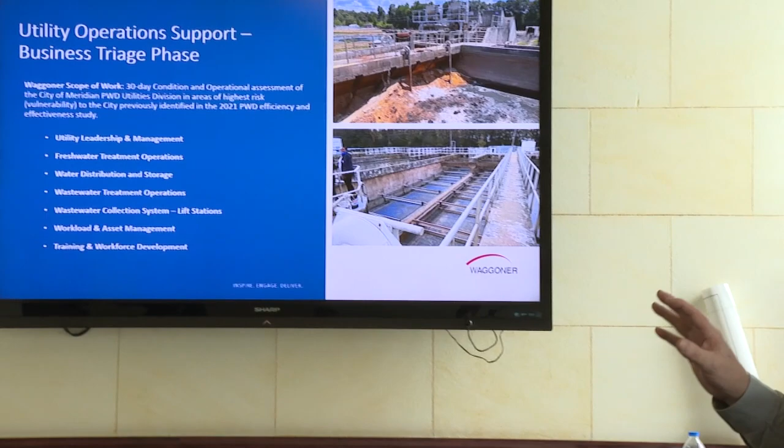So we were asked to do a 30-day business triage. It was to go through and look at the utility division, which is made up of water and wastewater. Specifically, we were looking at the areas of utility leadership and management, freshwater treatment operations, wastewater treatment operations, the distribution system and storage in the system for water, looking at the collection system for wastewater, workload and asset management for the staff that you had, and then training and workforce development. Those were the areas we specifically wanted to look at during this 30-day period.

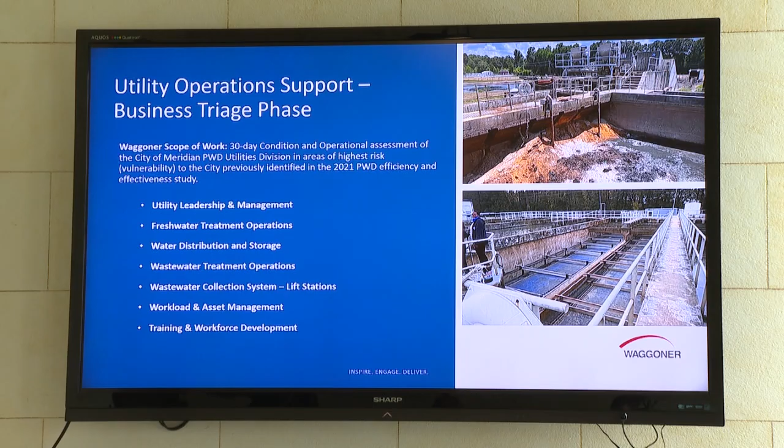Now, you can imagine 30 days is pretty quick, and that's a lot to cover in a short amount of time. Go to the next one.

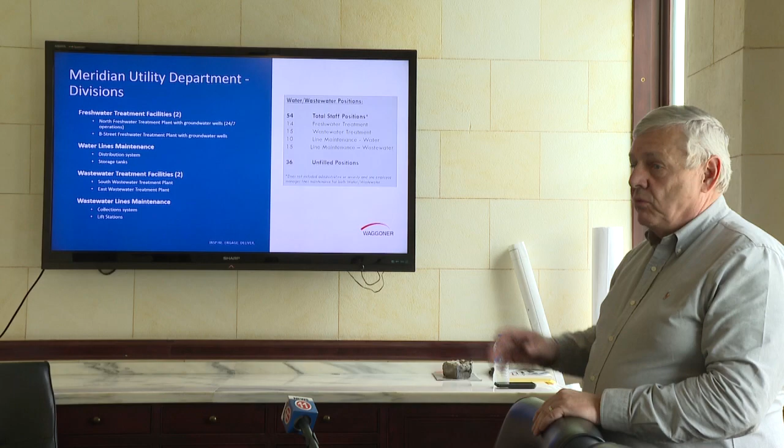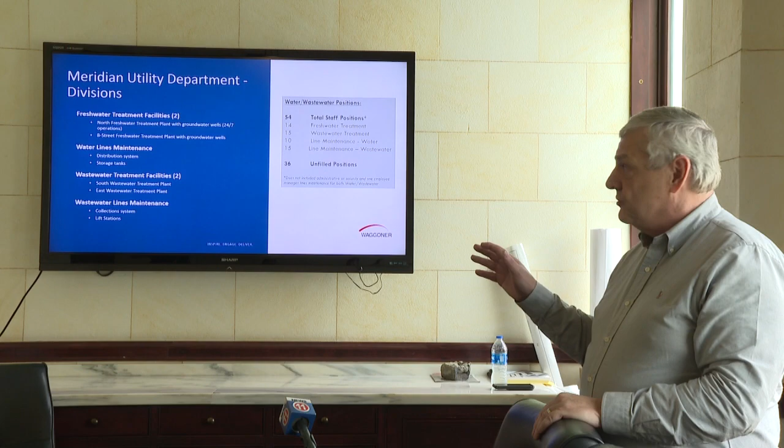And we had to do it in all these areas. In freshwater treatment, we have the North Water Treatment Plant and the B Street Water Treatment Plant. In water lines maintenance, we have about 470 miles of water distribution piping. Then you have 5 storage tanks that make up about 12 million gallons of storage in the system. And then you have 2 wastewater treatment plants: the South Wastewater Treatment Plant down by the airport, and the East Wastewater Treatment Plant on the east side of town. And then the collection system, which is roughly 450 miles, takes wastewater to those 2 wastewater treatment plants.

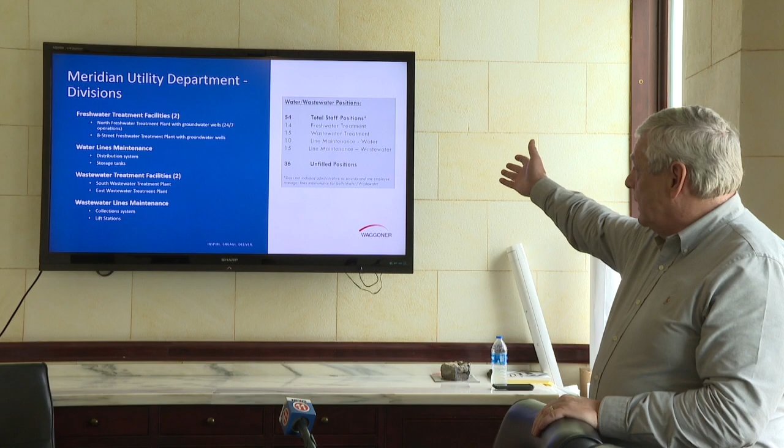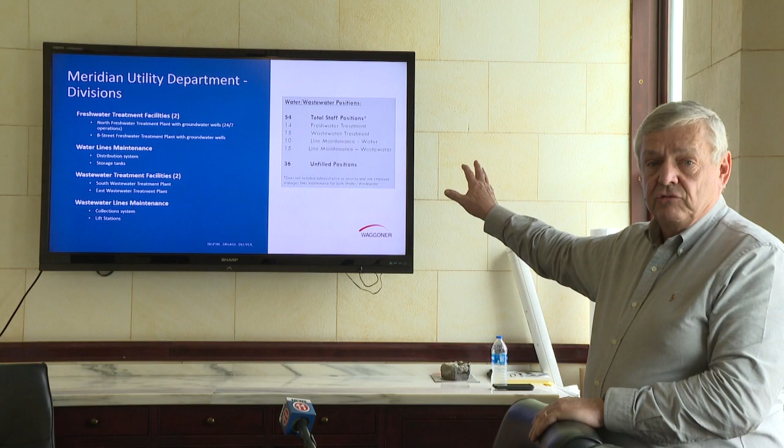In all of that, you have 54 people working on all those assets. And there are 36 unfilled positions at the moment.

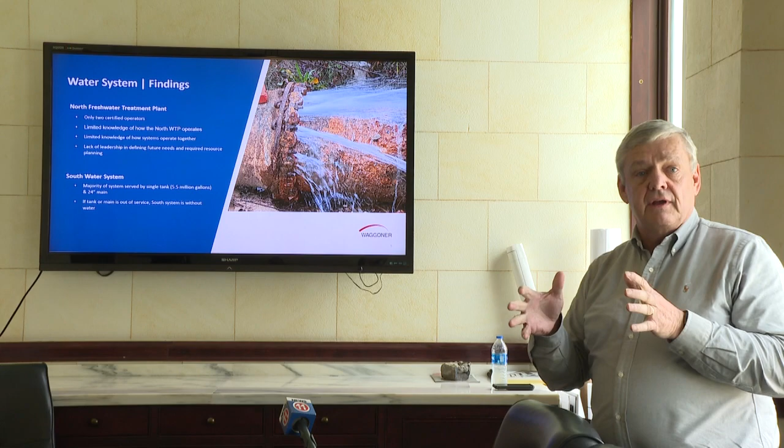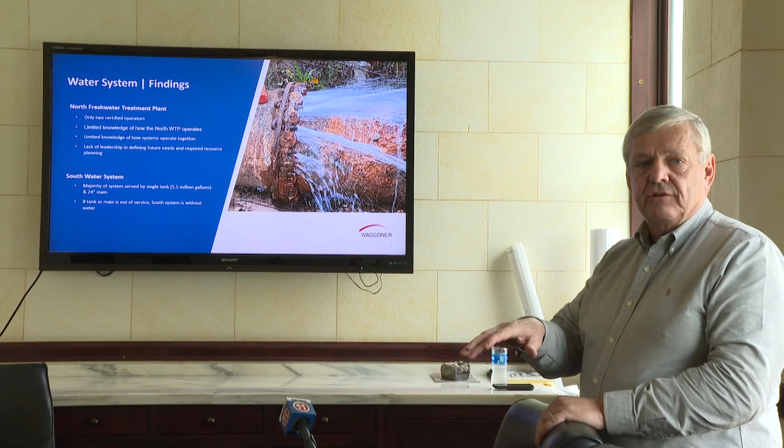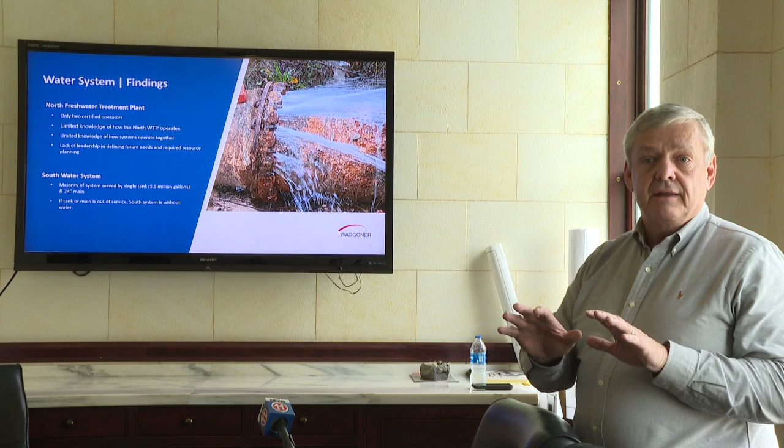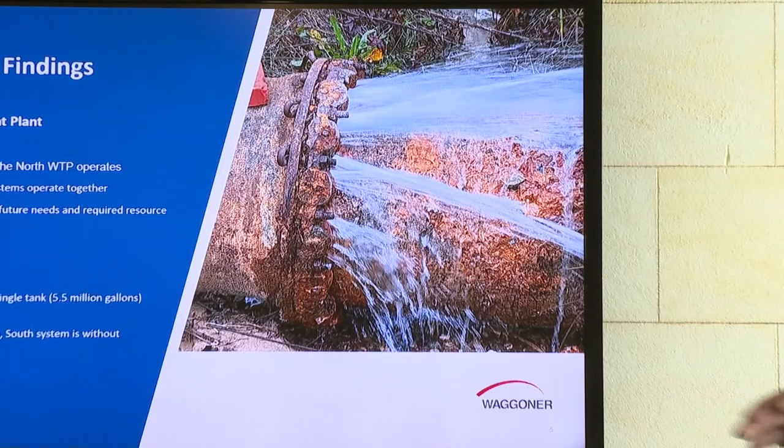So what did we find out? Well, what we found out on the freshwater treatment side is Meridian has 2 certified Class B water operators. You have to have Class B because you use groundwater that has iron and manganese in it. There's limited knowledge of how the North Water Treatment Plant is a very different plant than the B Street plant. The B Street plant is much more straightforward, not quite as sophisticated. The North plant is almost a blend between a wastewater plant and a water plant. And then there was limited knowledge of how the systems work together. They were very good at knowing what their freshwater treatment plants looked like, but not how that affected the distribution piping and the storage tanks in the system.

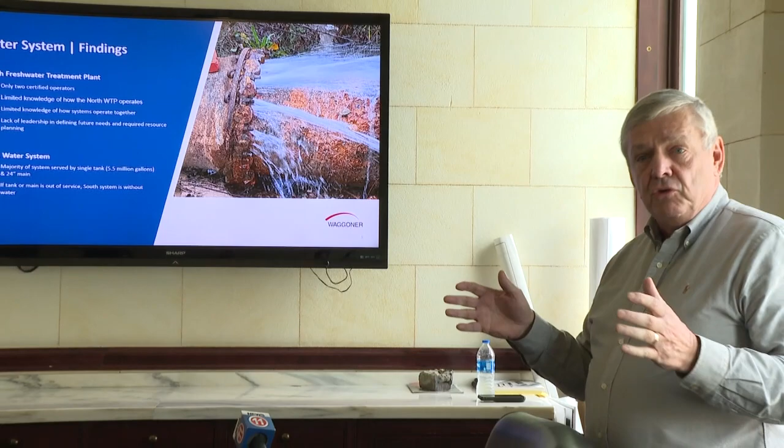And there was a lack of leadership. There wasn't a lot of people, a lot of people had left. So it's not that you didn't have people who knew what their job was, but prioritizing and looking to the future beyond just the whole public works department, focused on freshwater treatment itself, there was a void there.

On the south part of the system, which is from about 20th down on the distribution system, there's one tank, Mount Barton, 5.5 million gallons of water, so it's a lot of water. It's almost a day of supply for the city, but it can only supply up to about 20th Street. And if that tank is out of service, we have an issue on the south side of the system.

Back for a moment, I just want to point out, this pipe that you see here - the issues the city's dealing with in water and wastewater didn't happen in the last 2 years or last 5 years, they've happened over the last decades. This is a water pipe that's supposed to be underground, but because you have so much surface water, Sowashee Creek and all the creeks that go into it, it moves, and as it moves it eats away the soil, and it ate away the soil on this water pipe.

So as that pipe moved and bent, it started leaking around that seal right there. That's a 24-inch pipe from the south, or B Street, to Mount Barton that provides water to the south side of the system.

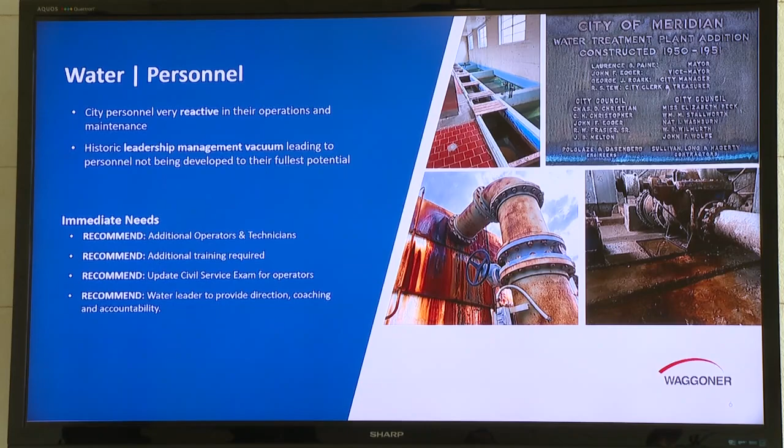Personnel are very reactive in their operations and maintenance, and that's almost by necessity. If something goes wrong, they have to go deal with it, and about the time they get that done, something else may go wrong and they have to deal with that. There's a historic leadership vacuum that kind of keeps people from getting developed.

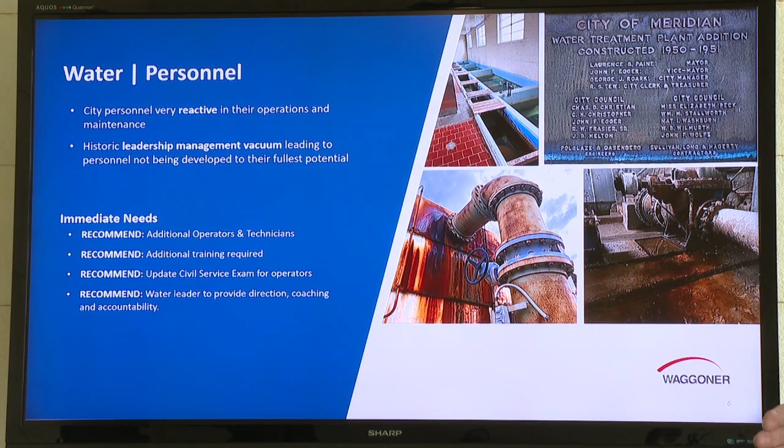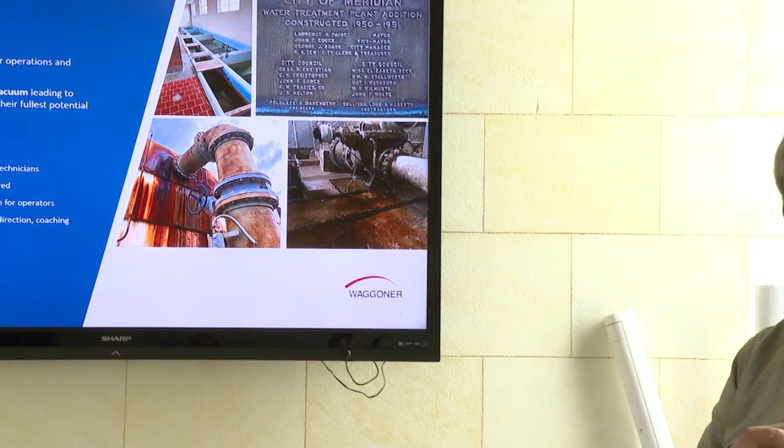They're not being taught and trained and brought up so that that succession, that next legacy of people, is coming through the system. So we recommended you need additional operators and technicians, people focused on the freshwater treatment plants, and additional training is required in proper operation and maintenance.

Update the civil service exam for operators - that's just something that would make it easier, as the state certifies operators, for you to be able to bring on new certified operators. And then get a water leader to provide the direction, coaching, and accountability for the team.

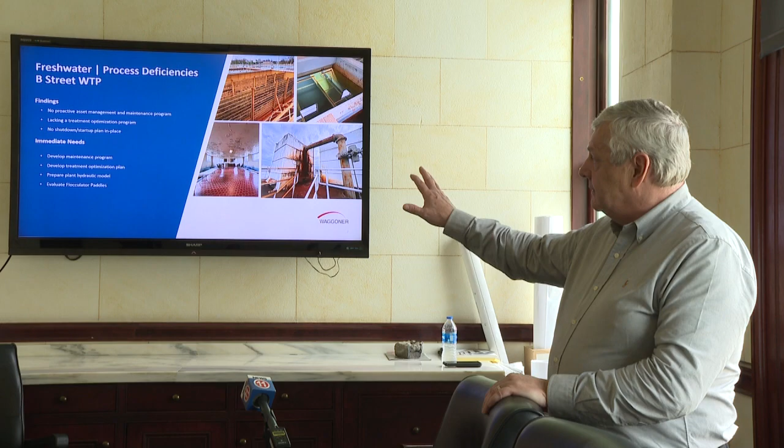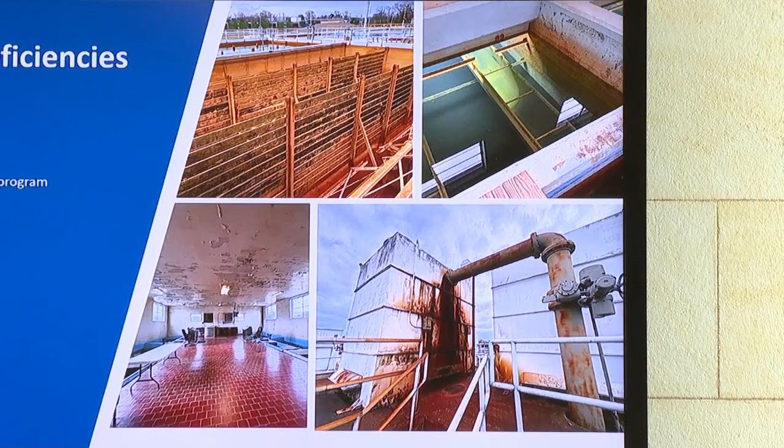Same thing on B Street. You can kind of see these pictures on the right - this is years of not proactively dealing with the assets, but waiting until something went wrong and then fixing it. We need to get more proactive in how we deal with the assets.

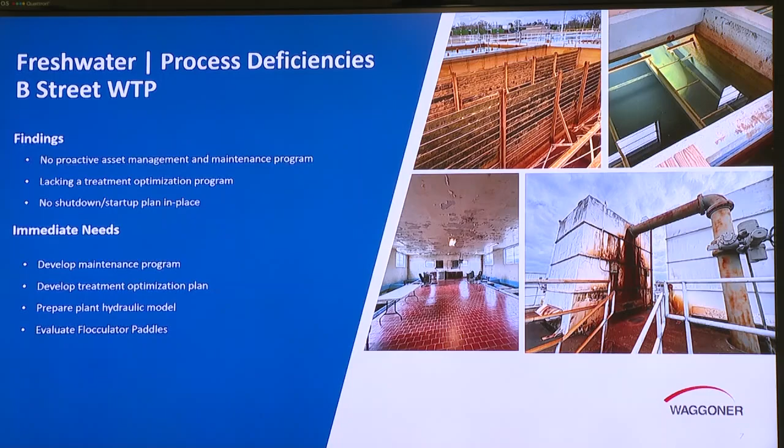The facility itself needs optimizing. It operates right now by filling up a tank, and then it shuts down for 2 or 3 days. We need to optimize and make sure that we're running plants consistently.

And then there's really no shutdown-startup procedure in place. If you're going to shut it down and then start it up, you need to make sure that it's done in a proper way so that something doesn't break.

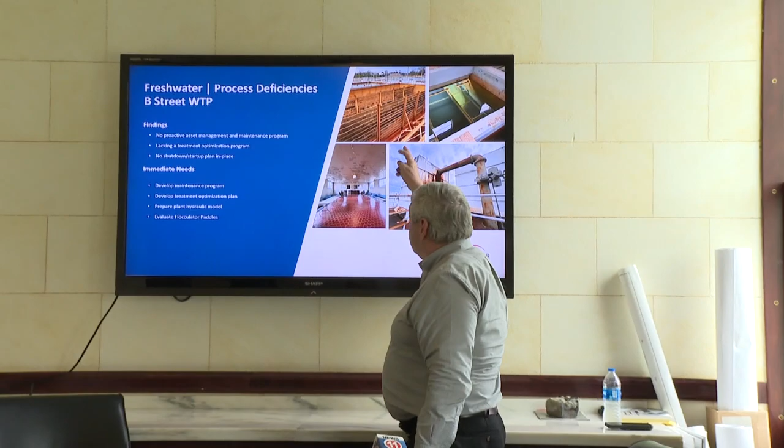Those were the immediate needs: a maintenance program, optimization plan, hydraulic model, and evaluation of those. These are flocculator paddles right here - they rotate, and we've since fixed those in the last 30 days by getting them welded back together so they can operate.

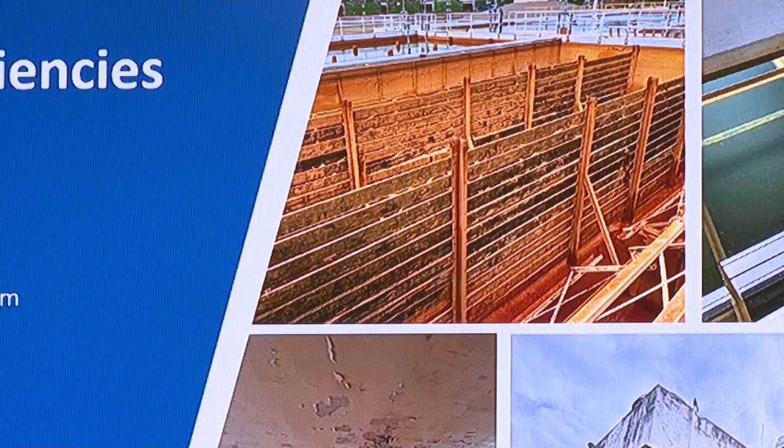The north plant is a little more sophisticated beast. And as you can see, this is called a rapid mix.

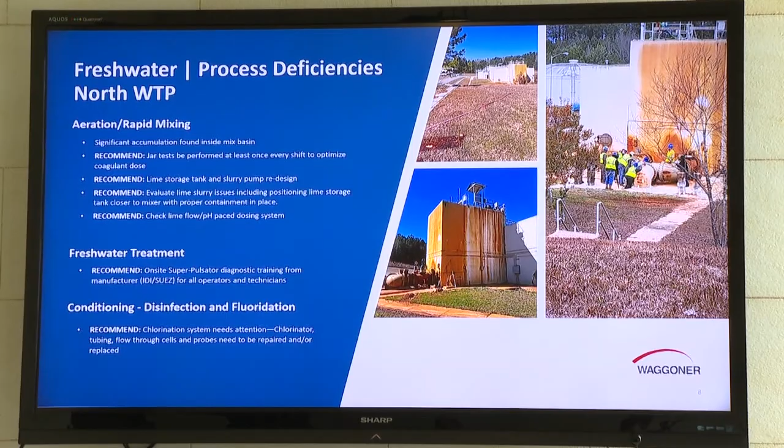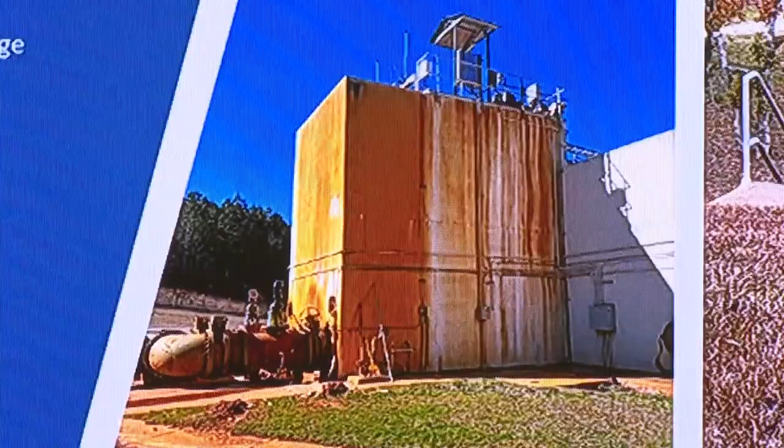Within the first week of us being brought on, there was a mixer issue. All that means is there's a paddle in there that keeps the chemicals you put in to drop the iron out of the water in solution. And they had stopped - that's what these two things are here.

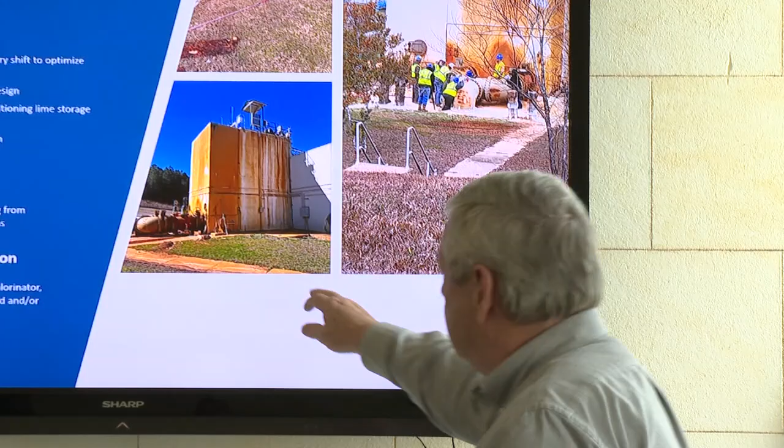It overflowed the rapid mix tank, and the mayor declared an emergency because we needed more than just 2 people to try to fix it. You can see all those yellow safety vests on the right.

That's a contractor working to fix that problem. He had about 9 people on site to do it. They got it done in about 3 weeks, and it's back up and running.

And the amount of precipitated iron that had fallen out of the water had filled those pipes up and was up in the rapid mix to about this level. At some point, if it had not been dealt with, it may have shut down the plant.

The distribution system is a lot of pipe. There are leaks in those pipes, so for every amount of water you pull out of a well and treat it and then put into the distribution system, if it leaks out on the ground, that's just money down the drain, literally.

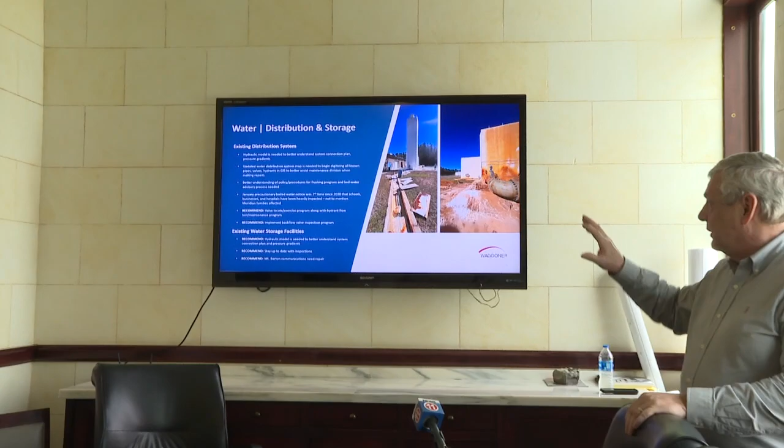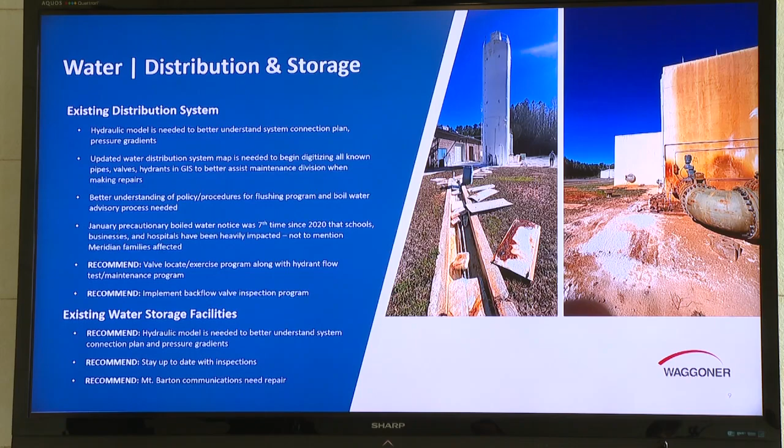We believe there's a lot of opportunity to save money by really identifying those leaks, getting a work management system in place - which this side of the utility hasn't had - and using that to start eliminating a lot of those leaks.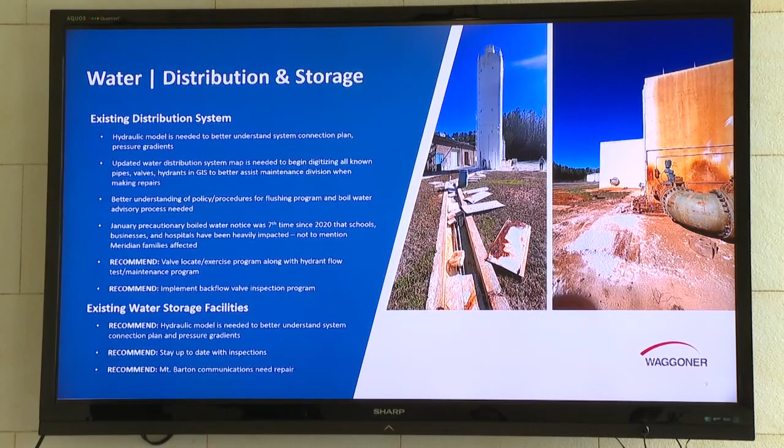The city's already started on the recommendation of a hydraulic model, the valve locate exercise program, and implementing backflow - we started that - and staying up to date on the inspections. We're now looking at Mount Barton and doing a remote evaluation of that tank because it's so critical to make sure there are no issues with it.

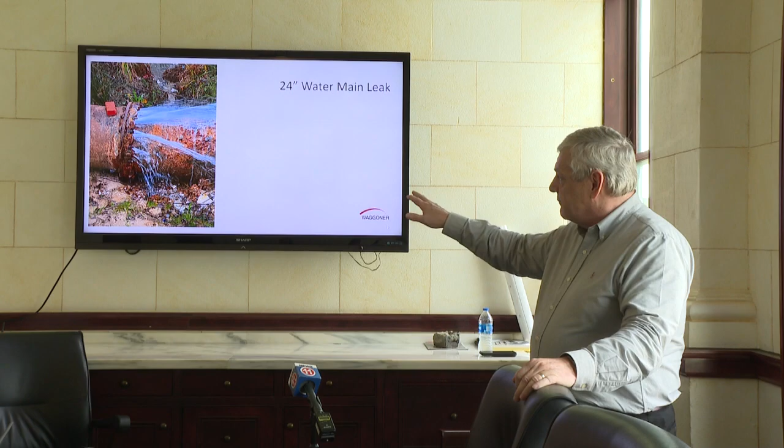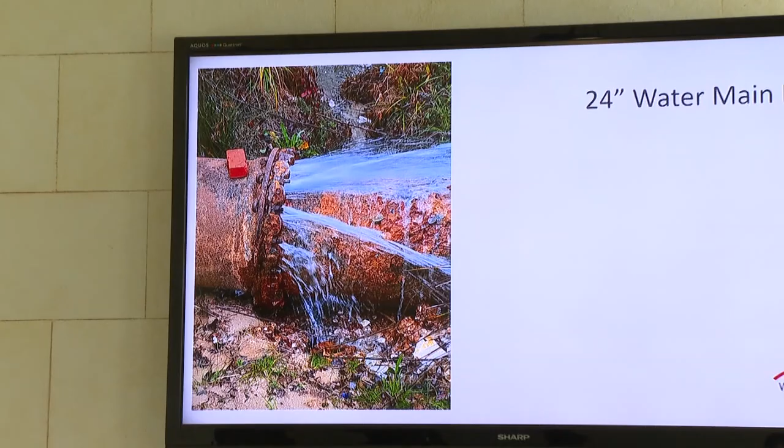That's the 24-inch break. I want you to see this pipe, how pitted it is - that's why it's important for us to proactively find these things.

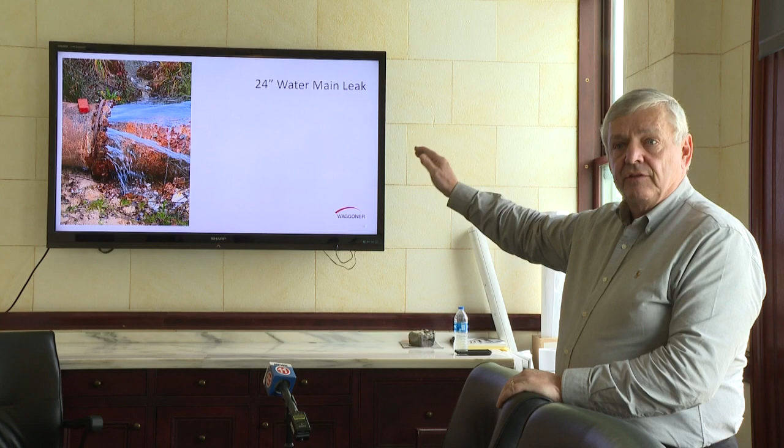Had that pipe ruptured, the fix would have taken days, maybe a week or more. We were able to get the crew out there, find a sleeve that allowed us to clamp it down and get it closed off until we can take the time and plan out a solution.

So being able to proactively deal with that versus if that entire joint had released, we'd have been down for days, maybe a week.

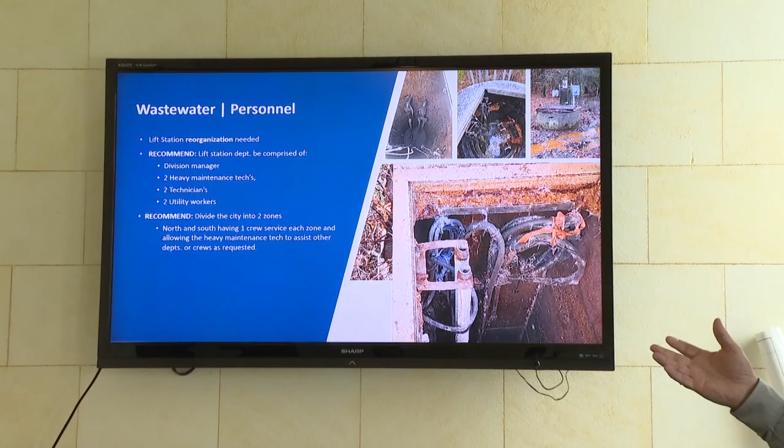But it's not just fresh water. You're aware the city's been under a consent decree, and fresh water is what people see because they turn on the taps. But the same mindset, the same needs exist on the wastewater side. We've been involved in wastewater program management, but not really on the operational side, other than to watch and help as we could with what public works has been trying to do.

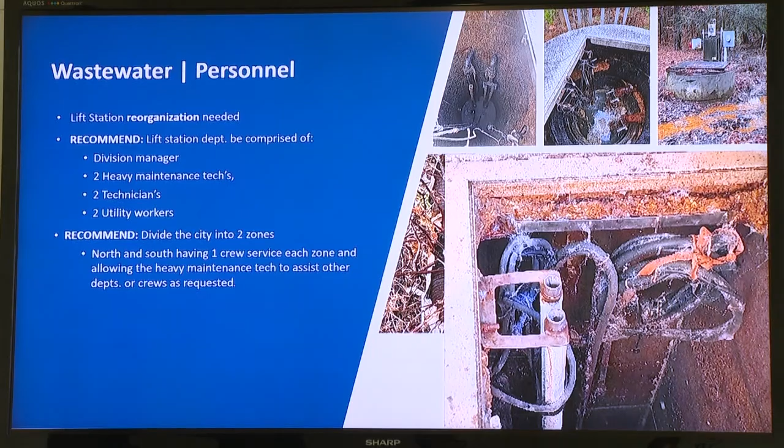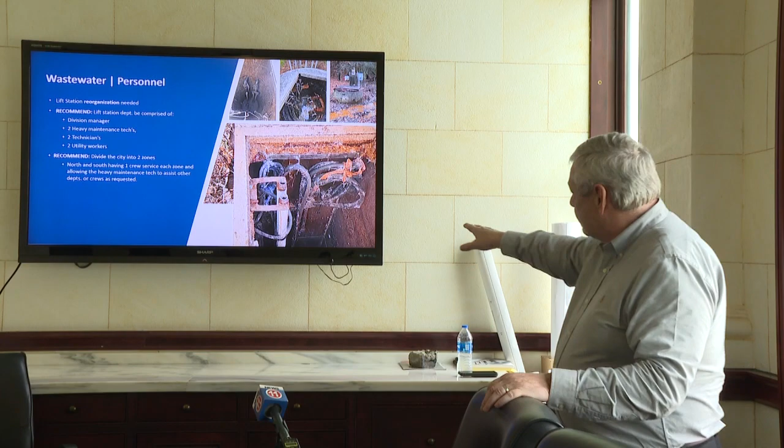We looked at it, and you really need a lift station department. These are all lift stations—wastewater comes into a tank, and a pump pumps it out until it can get to the wastewater treatment plant. Typically we try to do gravity flow, but we can't always do that if it's over a hill or something. You can see in these pictures how corroded things are.

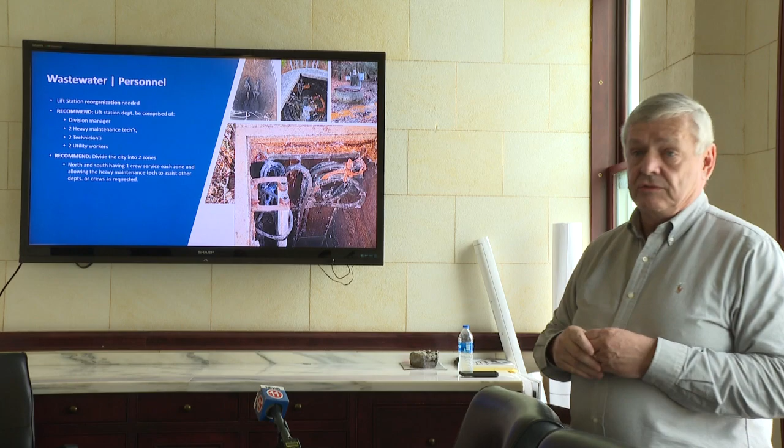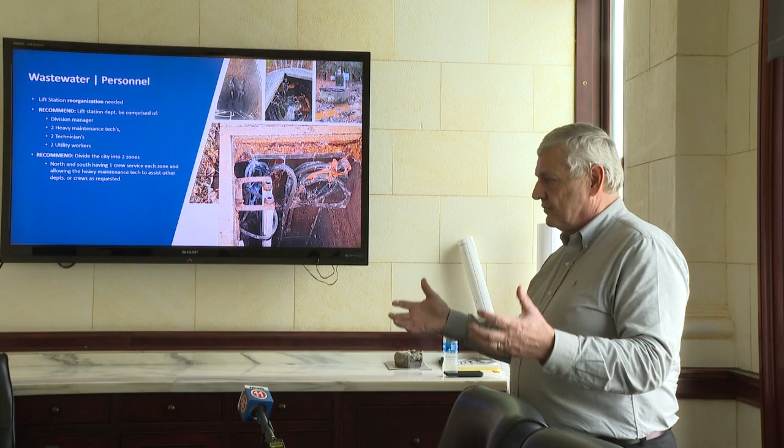That's just a matter of having over 60 lift stations, 67 lift stations. That's a lot to get to, and right now you have 2 people really focused on them. So we want to recommend dividing the city into zones, putting 2 crews on it, and starting to proactively go through them.

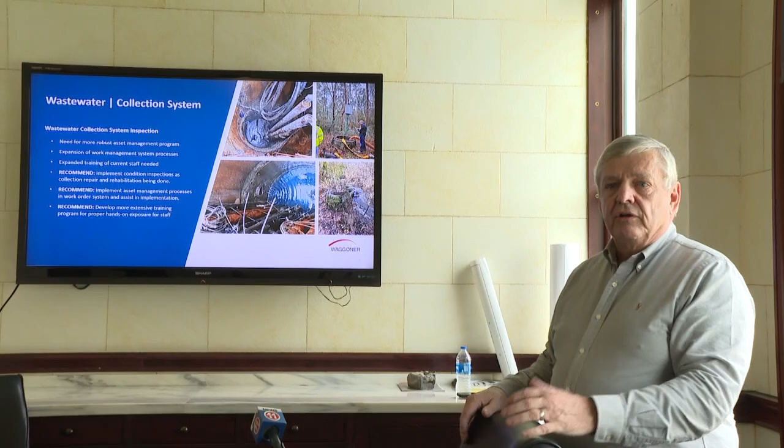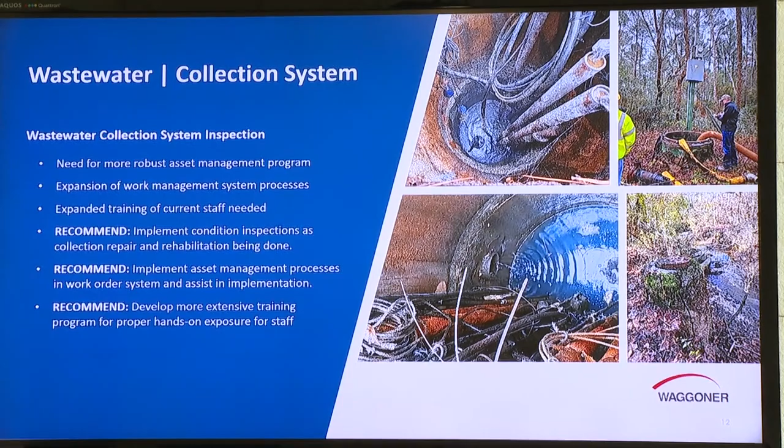It's kind of the same as we talked about on the water side, except it's on the wastewater side. Get a more robust asset management program that's more proactive than reactive, and expand training of current staff needed in work management systems and processes. Those are the recommendations we made.

Develop a more extensive training program that's hands-on, not just watching a webinar. There's nothing like going out and knowing, yeah, that's how that works, because it's not the same as watching a webinar or going to a conference. Those are good, but they don't replace hands-on training.

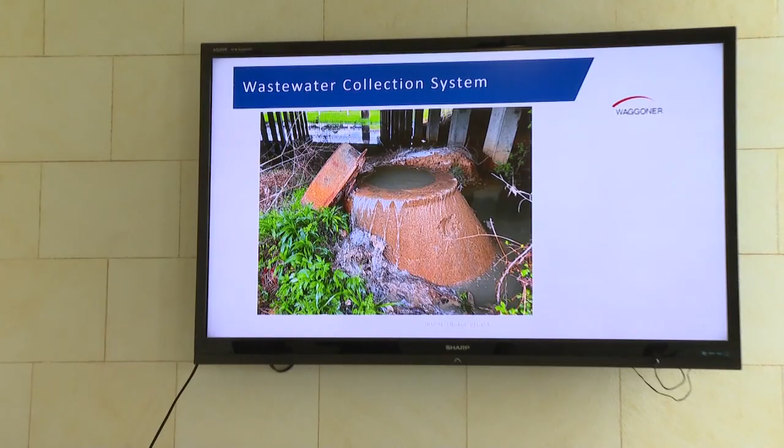This is what we're dealing with right now. I've had a lot of people ask me, does that mean we're in horrible trouble and things are falling apart? Not yet. But if we don't address these things—that water leak and water plant I showed you—in a proactive manner moving forward, we're going in the wrong direction. We can't have sewer manholes overflowing.

The consent decree most certainly puts emphasis on this. We don't have that same consent decree on the water side. We don't want one. So the mayor's trying to proactively deal with that so we don't have to. Many communities find themselves under consent decrees on both the water and wastewater side. We don't want that.

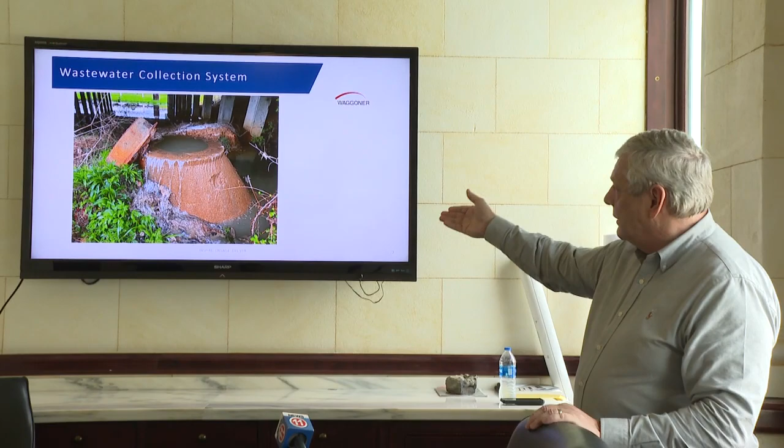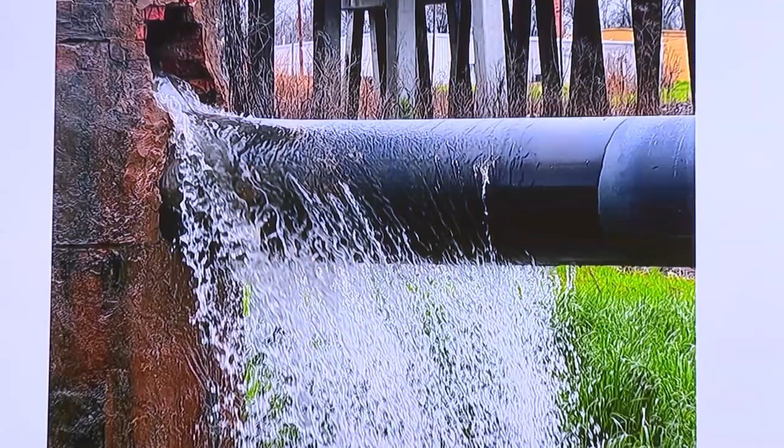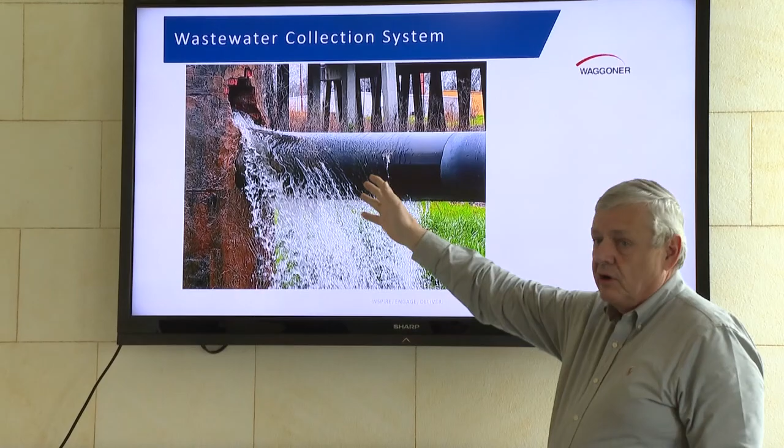This is a backup on the other side of Wendy's, just before 22nd Street, coming into town before you cross Sawashi. This is a manhole, and this is a gravity sewer line that typically would just flow even though it's above ground. But it's surcharged—it's got a blockage, it's backed up, and so it's coming out this manhole. They're over there now working to repair that.

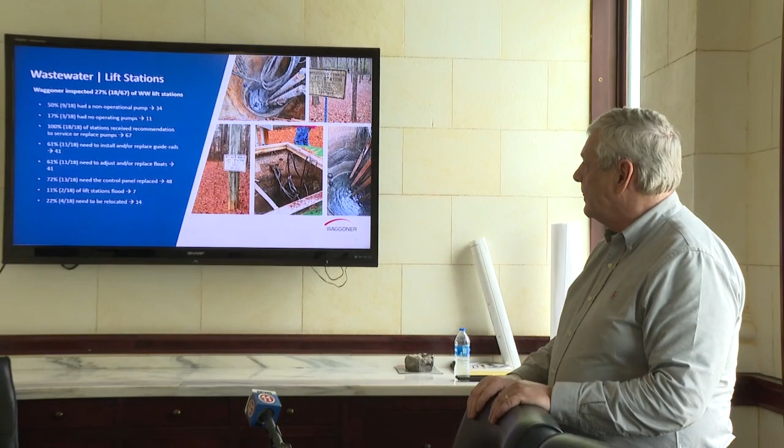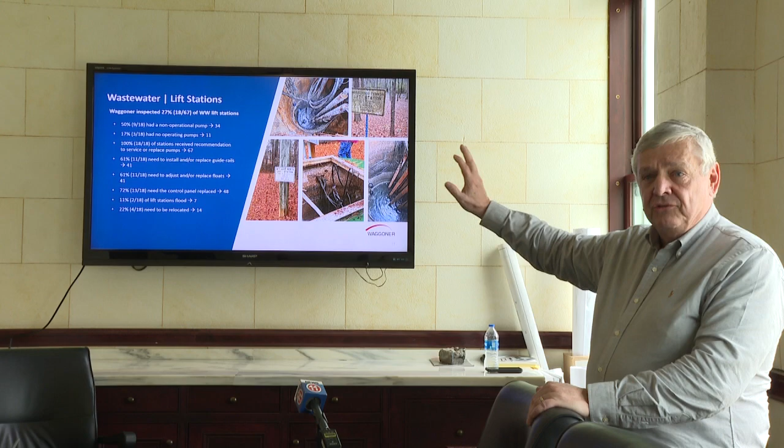Lift stations, we talked about that. In 30 days we had to do all this—we did 18 out of 67, and used those statistics. Roughly 50% had non-operational pumps; taken out to 67, that'd be 34. 17% had no operating pump—that's 11.

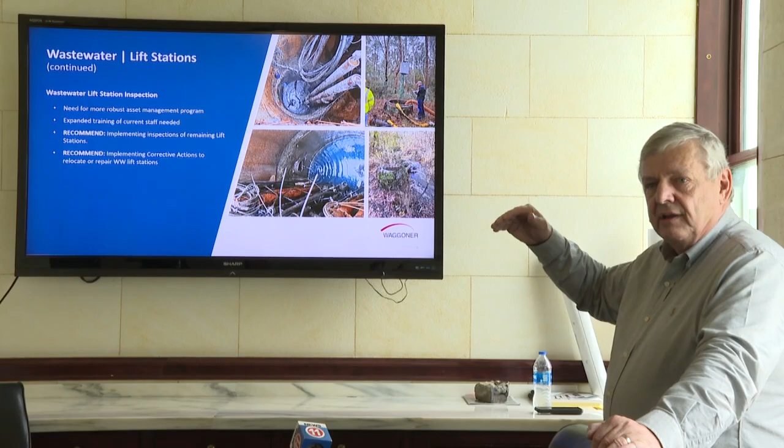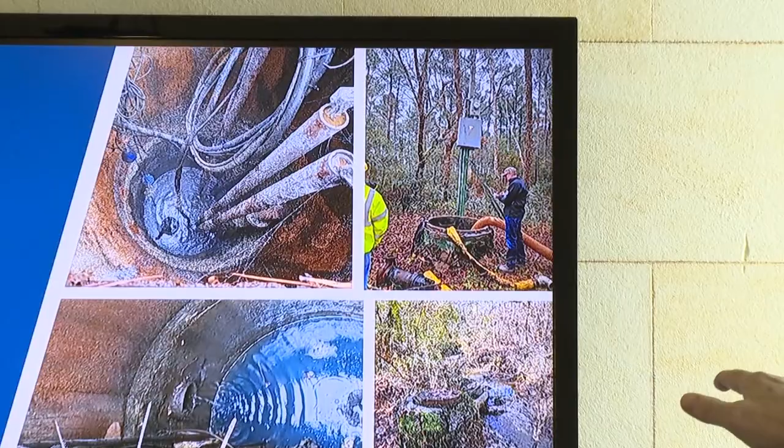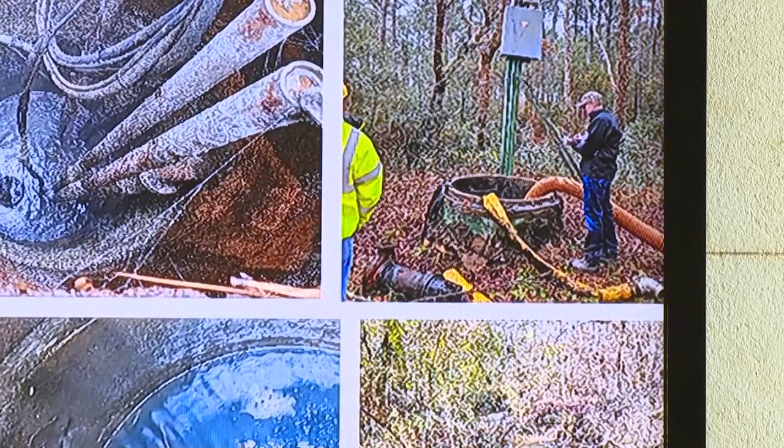One of the recommendations: there are some lift stations and pump stations that need to be relocated. If you look at the one in the top right corner, you'll see that power panel way up in the air. The reason is that area floods—it's in a floodplain, and the water gets up over that manhole. So you can imagine if that water gets up over the manhole and it doesn't have a top on it, all that water just goes into the sewer system and ends up at the wastewater treatment plant, where we put chemicals and electricity into it by blowers, aeration. It costs the city money. We believe there's a lot of money to be saved by getting on the front end of these things.

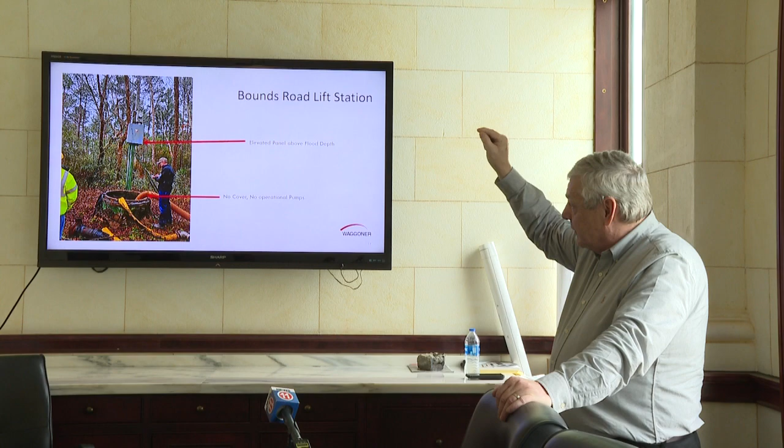That's that manhole I was just talking about. That flood depth, that panel is high enough that the 100-year flood won't flood it, or maybe even the 500-year flood. But it most certainly, if it's that high and it doesn't hit the electrical panel, it most certainly goes into the manhole.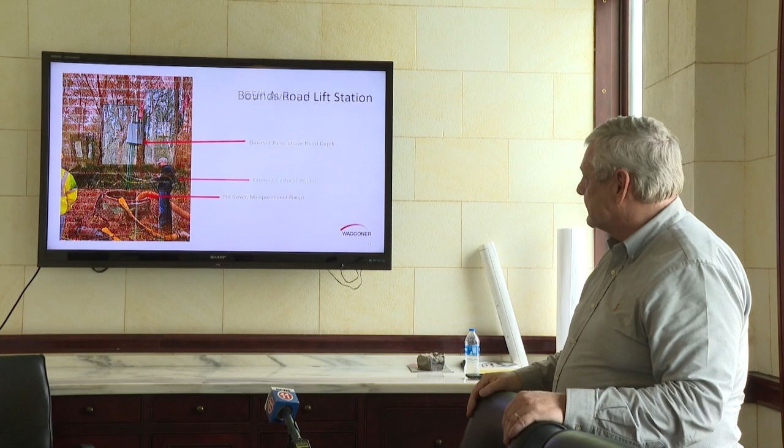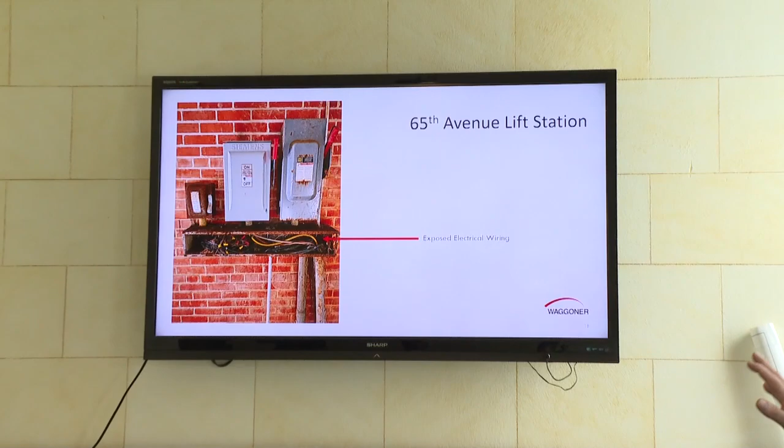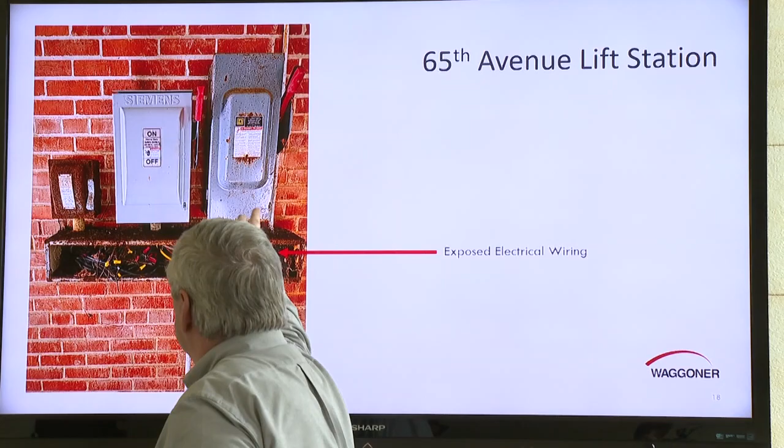Some lift stations, the electrical panels need work. And we want to make sure we have training where people do not put their hands in things like that. Electricity is not something to be messed with, but you can tell. We did get somebody to replace this one, but this and even that still need to be replaced.

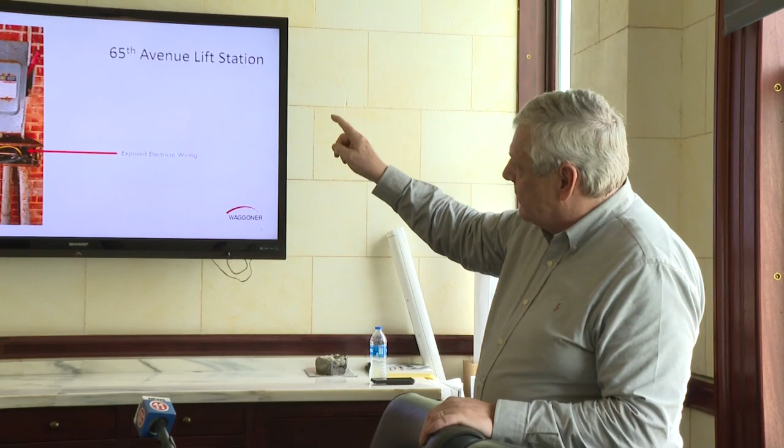So when these things happen, we want to be proactive and take care of all of the issues, not just the immediate. The reason that one on the left was probably replaced is it probably wasn't functional when they found the problem, so they had to replace it. But really, we need to go back and look at those and figure out how do we replace all this in the next year so that we don't have any problems in the future or any safety issues.

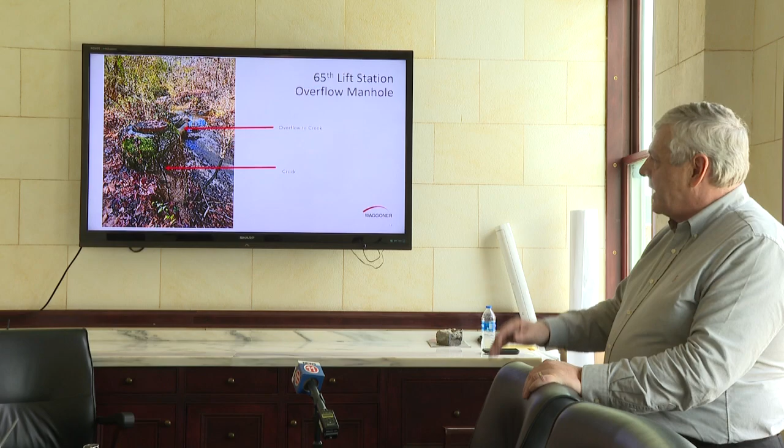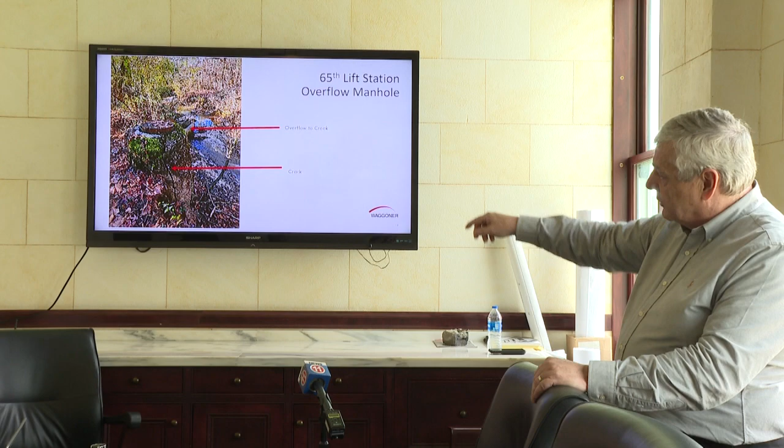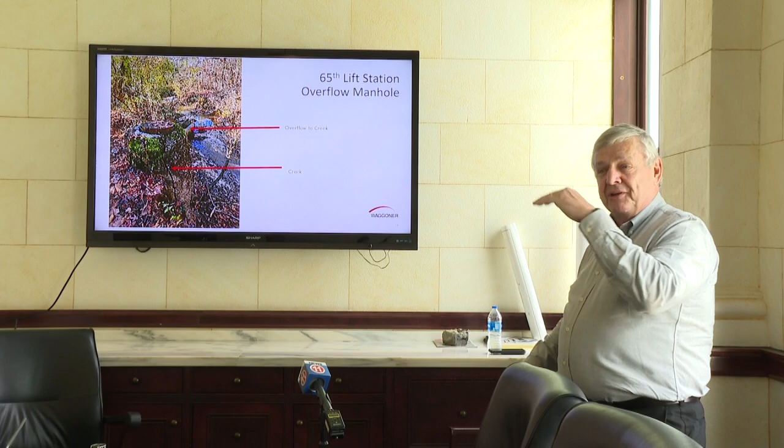This is just an overflow manhole for a lift station, so the lift station pump goes out, it goes to that manhole, but you can see it's an old manhole. Because things are growing in it, it's caused a pretty good sized crack. We just need to get it fixed. Just an observation we made. I'm sure it's on their list, but it's probably way down the list because of all the other things like the other pictures you saw.

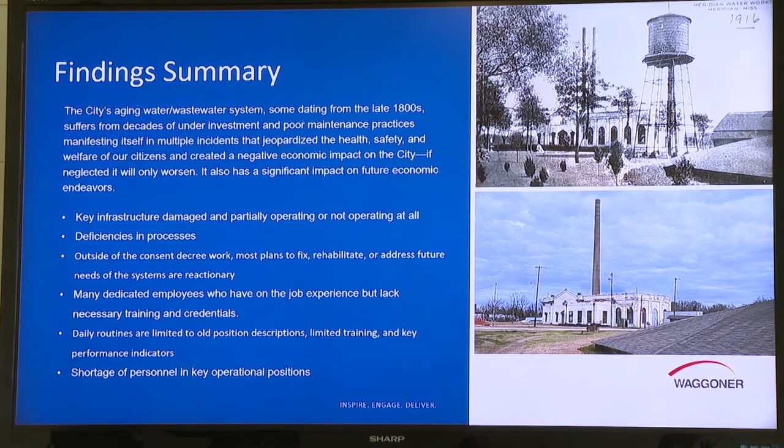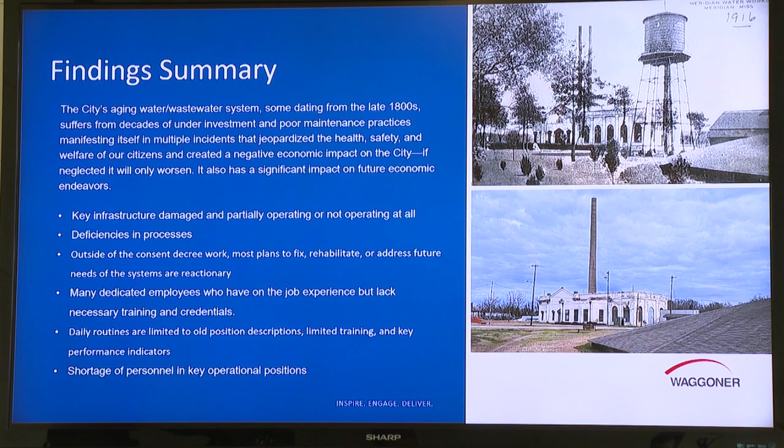So these were our findings. Your infrastructure is old, from the late 1800s to the early 1900s. You had that water treatment plant, that's the original B Street water plant up on the top right. It was steam operated. This is still there today, but the only thing that's used in there is some electrical wiring and plumbing that connects to your system. And we even have leaks in there.

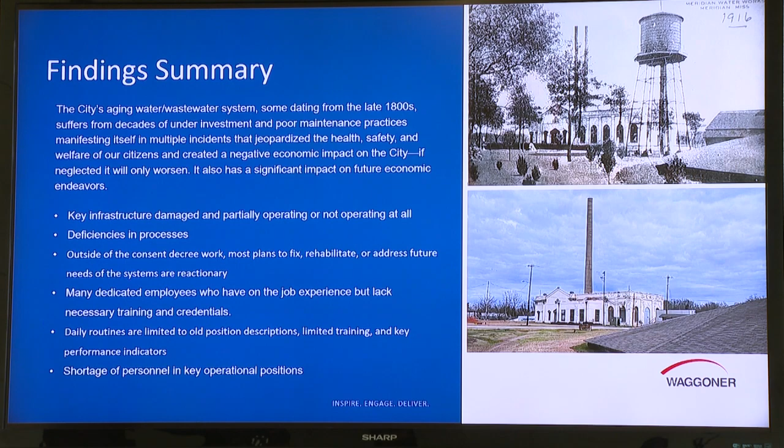But key infrastructure is partially operating or deteriorating to a point that it needs to be replaced. And there are deficiencies in processes. Everybody knows how they do their job, but it's all right here. And as people leave, that becomes harder and harder to teach new people coming in how to do those jobs. So we believe you need to get those processes formalized.

And then outside of the consent decree, most plans to fix, rehabilitate, or address future needs are reactionary. They need to be more planned out, master planned, capital improvement plans done each year so that you know what projects to fund. Many dedicated employees have on-the-job experience but really lack necessary training, proper training and credentials, certifications that we would like for them to have.

Daily routines are limited to the old position descriptions that they've had, and there really are no key performance indicators. How am I doing on my job, other than I come to work, I do what I'm supposed to do all day, and then I go home? And then there's a shortage of personnel in key operational positions.

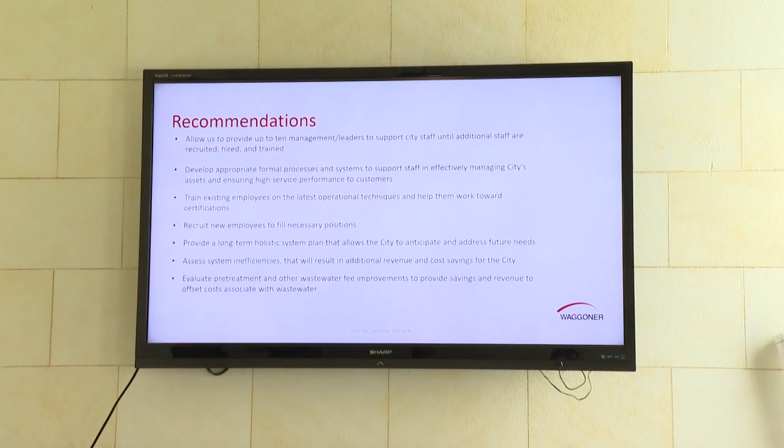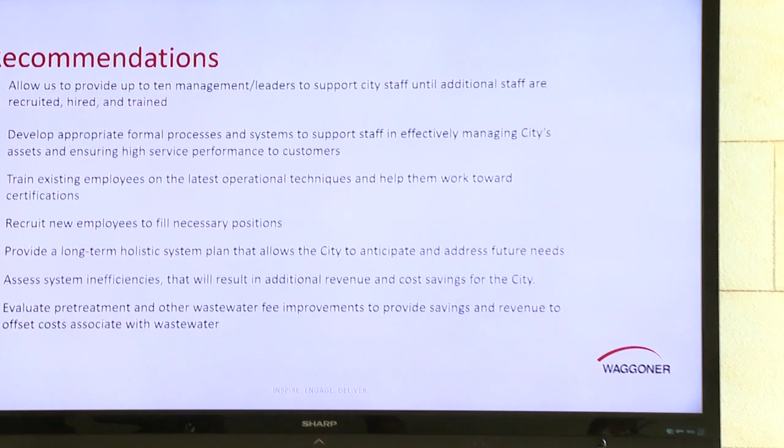Last slide. We made a recommendation to try to help the city start to develop your staff, your personnel, by bringing in 10 management leaders. There are a lot of doers and very few leaders and managers to help those doers develop. So we propose bringing in help for the city staff through recruitment, hiring, and training to bolster what you have, and develop appropriate formal processes and systems to support staff so that they effectively and efficiently manage the assets that the city is responsible for.

Train those existing employees on the latest operational techniques and help them with new tools to acquire their needed certifications, so that you're not like the water plant where you've got 2 certified operators. Let's get 6 certified operators. Recruit new employees to fill necessary positions.

Come up with a more holistic plan for the system so that employees know what the future needs are and they start addressing those. And then those inefficiencies that I pointed out where you can save money, and potentially even raise some fees to grow fees, as in the sense of pre-treatment fees that are required for wastewater, for example, or new economic development where you can offer water, where you can get some new revenue sources. Don't look just at cost cutting, but look for new revenue sources so that then you can start to reward and recognize your people for that, and then evaluate those to offset those costs associated to your customers. Help them with their level of service.